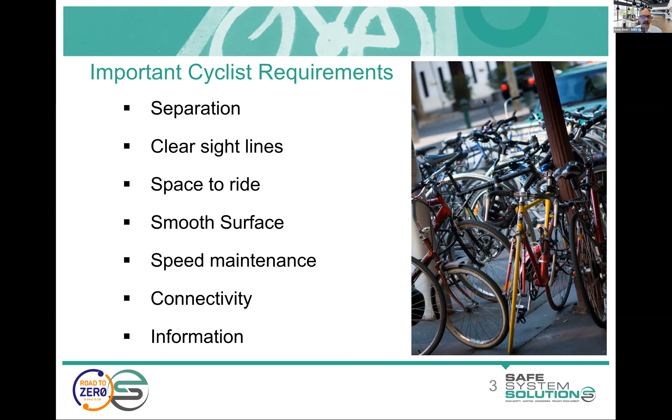So this is a sort of general cycling requirements. There's different sort of lists of things people say that you should be providing for cyclists, and I think they all have merit, and this is just one of them. But separation, clear sight lines, space to ride, good surface. Speed maintenance is an interesting one, I'll talk about that, and it's linked to safety later. Connectivity and information.

But you can kind of boil it down that auditors need to think like cyclists, or think like people that ride bikes, and that often isn't too hard for a lot of auditors because they do ride bikes, or they have ridden bikes, or it's something that quite a few people do.

You do need to think a little bit beyond just your basic riding and think holistically, but I'll point you at a few things you can do when you're doing an audit to consider that. Simple questions: would I feel safe using that road if I was riding? If I turned here, could a car see me? I've got sightline impediments, and I'm in the dooring zone. So these are all good questions to ask.

But beyond just, would I feel safe? We're trying to cater for this variety of people that ride bikes, and it is probably the road user group with the biggest, let's say, varied setup. So yes, we've got the 8-year-old, the 80-year-old, and that's a common little design thing to think. Are you designing for an 8-year-old and an 80-year-old? You should likely capture everything in between.

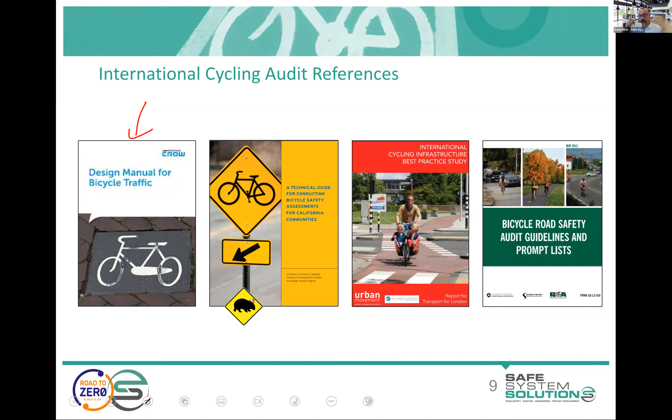But what I do find as a road safety auditor is that they'll be doing alterations to an existing bit of road, or diverting cyclists through an area because maybe they're doing construction, or it's a new bike route or something like that, and there is an existing longitudinal grate, and the cyclists are sort of going through that area. So a very simple one to look out for.

I've got a couple of expert witness legal cases associated with this. One was an interesting one where a shopping centre was being redeveloped. As part of that redevelopment, they were building a lot of bicycle parking, like a storage area - what do you call it - like a little pumping and maintenance station, and lots of signage to encourage bikes off a separated shared path facility, saying this is the way to the shopping centre. It's a wonderful thing to be doing.

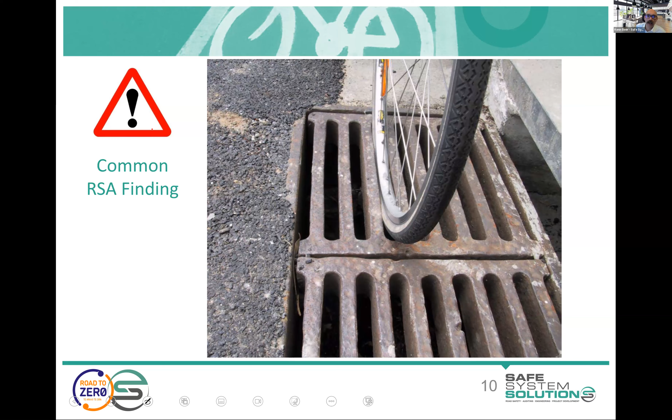Another common finding - well, common may be an exaggeration, it's happened a handful of times that we've seen this - but one to have a think about. So this design came in to do cycling infrastructure upgrades. Some of it not really infrastructure, just paint, but there were some infrastructure parts to it.

Now, to risk assess that is a very challenging thing. I certainly look at it and think I really don't think that a driver is not going to see a cyclist - they're right in front of them - but it's sort of going to be a road rage issue more than anything else here. And it's kind of hard to get to a crash associated with this. You can probably start to talk about it with a vehicle maybe going around the cyclist, and there could be issues there.

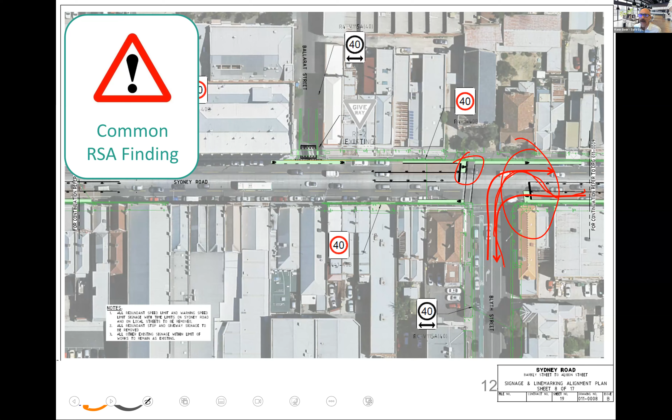Now, I do have a little quiz, more of a visual quiz, to get you looking for some issues in an existing site.

Yeah Ken, it looks like it's 50-50, we've got some sound issues for you. I can plug in a microphone. Should we give that a go? People are saying it's fine. But I think it's fine for some and not for others. Maybe could we try a microphone? I'm not sure which end it's on, but if it's fine for some, I'm pretty sure it's not my end. Okay, I'm happy to try and sort that out. How about I put the quiz up and give people a few minutes to look for issues, they type it in, and then I'll play with that and see what I can do. Perfect, okay, it could just be my voice being crackly as well.

Okay, here it is. What I want you to do is be a road safety auditor on the existing conditions, and find me issues, safety issues for cyclists. Type them into the chat.

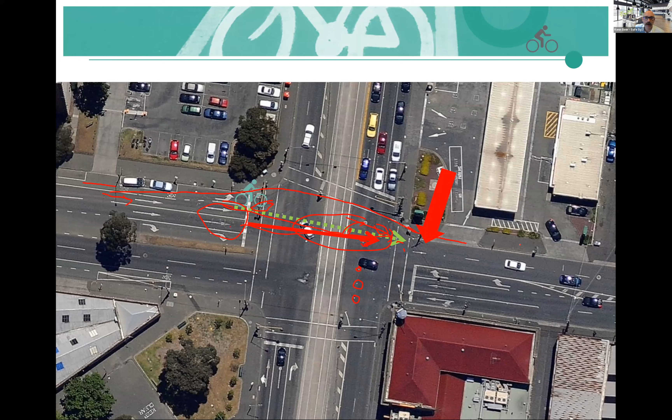And we're seeing some more of those coming out around Australia and New Zealand. I say New Zealand, I believe there's some designs floating around, but I don't think anything's been built. I can show you some of the Australian examples shortly.

You can head start bikes off early to give them a run, and you can do protected intersections, which help in these scenarios. Protected bike lanes are the real huge benefit in all of these sorts of scenarios, which I'll show you examples of shortly, and point out some things we need to think about as road safety auditors.

So cyclists and roundabouts has always been an interesting topic. This is the old guidance from Austroads and Kotahi in terms of how you'd design a roundabout, essentially an urban one-lane roundabout. It used to be that you'd try to get the cyclists as far off the edge as possible, push them out here for that riding path, so that they're away from cars.

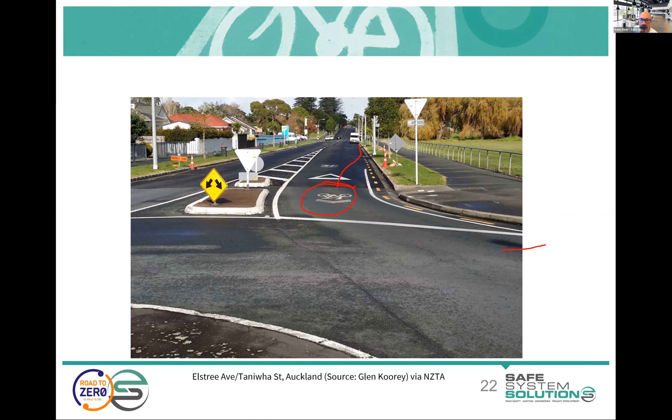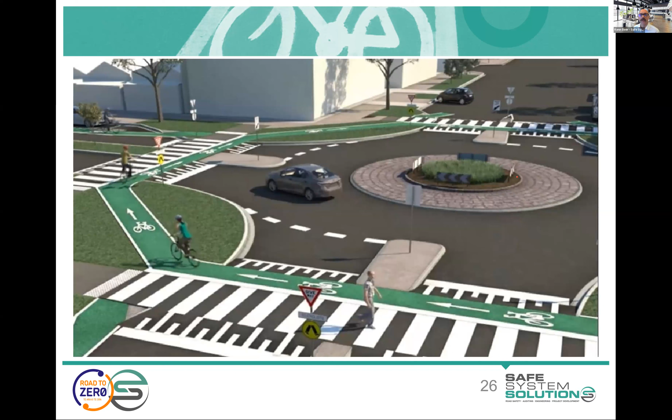Best practice is to provide a priority cyclist treatment around the outside of the roundabout on a raised platform. This type of setup is exceptional in terms of safety performance for people that ride bikes, and pedestrians in this case as well. It's encouraging - a lot of people will feel safe riding their bike through this area, and confident to do it. So that's a Dutch style roundabout. The Dutch have been doing this for a long, long time. This one's in Melbourne.

Anybody who comes to Melbourne, I'll take you for a ride through this. The idea is you keep all your good roundabout features, and you get the bikes to use this facility, and they go all the way around it. If they want to do a right turn, they'll go all the way around the outside.

Ken asks a quick question: Janko wants to know if this will actually work outside of the Netherlands, referring to the design on screen, since New Zealand drivers won't be used to it. Sean comments that the lanes are very narrow, even for one direction. Marie adds there are similar examples in New Zealand, at Richmond near Nelson.

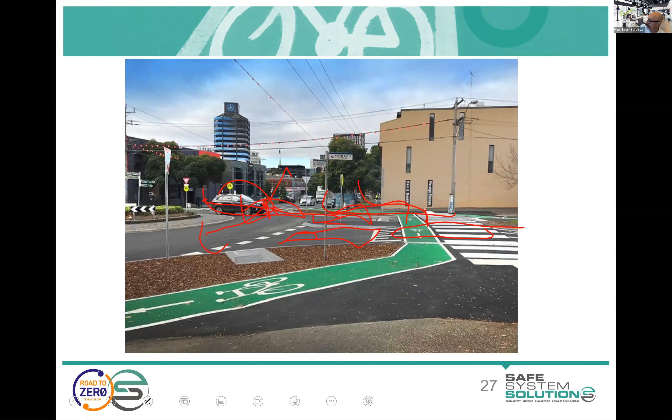Anyway, I've probably got to keep moving on, Kathy. Sorry, just one more thing - there's some great commentary about it feeling more comfortable cycling through a roundabout like this than one without any protection. Shamar saying, I think in New Zealand now you have to start putting additional give way road markings to show the priority to pedestrians and cyclists. And one more question about thoughts on safety with sharrows in general. I heard some commentary from overseas that they can reduce safety, but maybe that's where they're used in inappropriate places. What are your thoughts on sharrows, Kathy? You don't hide your thoughts on them?

So we've had a look at sharrows and their potential in higher speed environments, and it wasn't an empirical study and analysis - it was more of a think tank of designers and the like, and safety experts. It was deemed that would present a safety issue in a high speed environment. In a low speed environment, we believed it had enough to add safety if you weren't able to do something fundamental like this. But it's the acknowledgement that it's just not going to get used by a fair bulk of cyclists - they're not going to actively claim that lane.

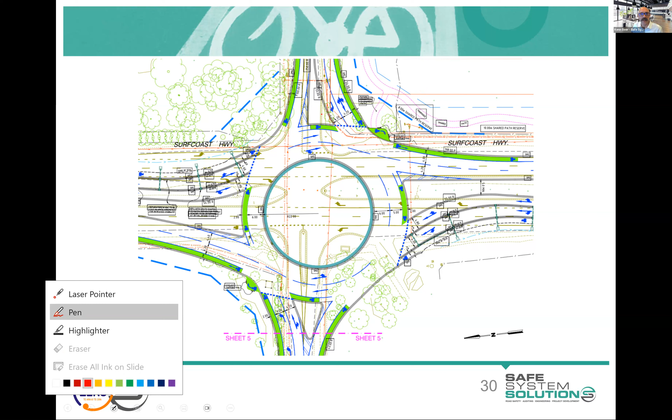They were putting like a staging spot for a bike, because 2-lane roundabouts are very problematic for bikes, and this happened to have quite a bit of bike traffic. So I was saying, okay, let's have a little staging so they can pause here, and then go when there's a safe time to do it. From an audit perspective, you look at that and go, well, there might be a little bit of benefit, but I see some dangers associated with that. Mine are, well, you're going to fit one cyclist in there, is that right? And then what does the second one do, and where are they going to prop? And then you've got larger vehicles tracking around here, and if you've got the cyclist standing there, there's a fair chance that they're going to get clipped. So it's not a great idea.

I mean, Kathy - Reese, who used to be one of our road designers, he calls this the mammal pouch.

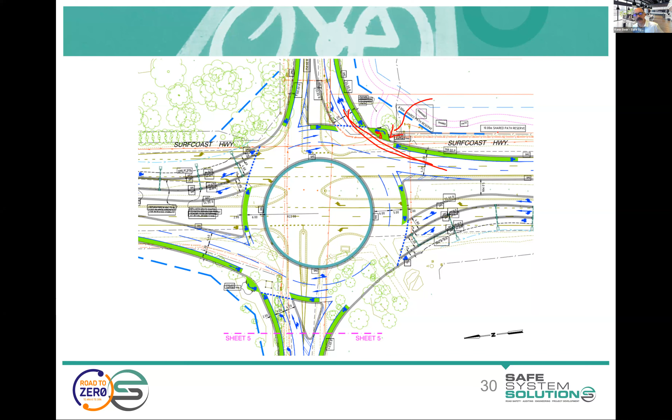Spot for the middle-aged men in Lycra to pause.

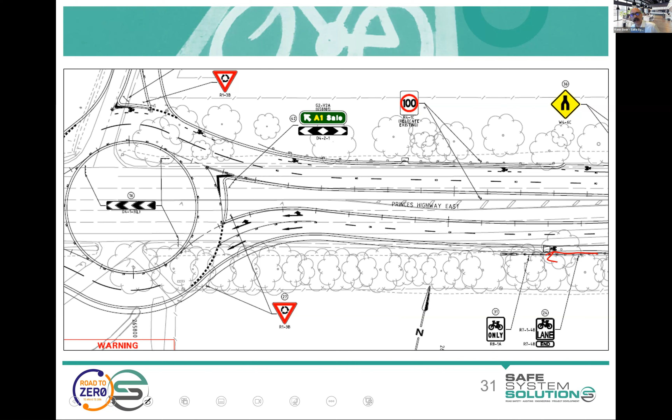This one was interesting. As a road safety audit, you look at this at design stage, and even with a bit more detail, it all looks pretty good. You've got the bike getting a separated, raised path to navigate through this roundabout if they're going straight. Going right is a bit more problematic, but you go, oh, that all looks very good, looks like it's signed.

Then you go out and have a look at it built, and it's there, but most cyclists would just go, okay, battle it through the roundabout again, because it kind of just looks like the bike lane ends, doesn't it? There's a little bike only marking, but what is that actually referring to? Some green paint would just have done an amazing job to indicate that facility, all that money spent, is actually for cyclists. So I think that could work quite nicely.

There's an example of using green marking to highlight a direction of travel for bikes. That's not its traditional use. Green markings were invented to point out to a driver a conflict point with a bike, so a driver would be more aware to look for bikes coming through that path. It's more expanded now to also include that directional use. If anybody can work out bike colors from around the world, I applaud you, because there's no conformity worldwide in what color to use.

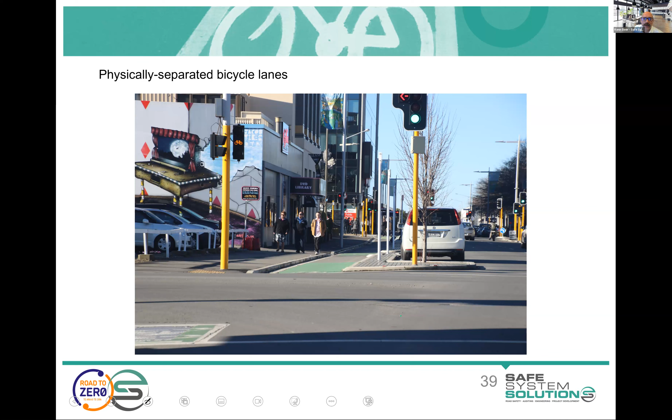This one is out of the New Zealand guidance document. Entering and exiting driveways can be a challenge, and the idea to slow the vehicle at that entry point is very good, and I like this style. Or you can use a cobblestone or bluestone treatment through here. You're really just trying to stop that fast dart of a vehicle in.

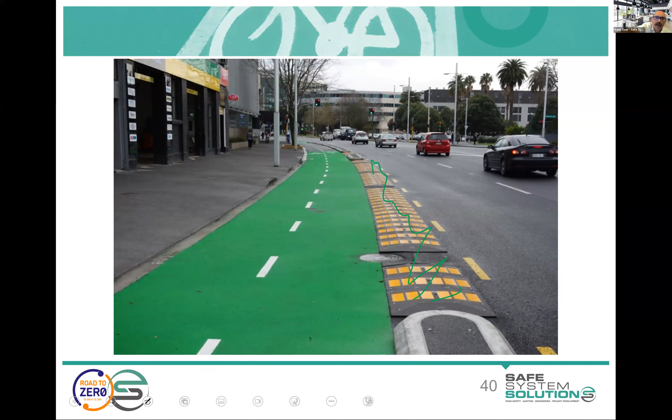Of course, in some situations we actively want to slow cyclists down because of a particular conflict point, like a pedestrian crossing. You can do raised treatments on bike facilities like this one, again in Christchurch, with the raised bit there slowing cyclists on the approach to the pedestrian crossing. So that is an option. We like to try to give cyclists a good free run, to encourage lots of cycling, but sometimes you need to consider that.

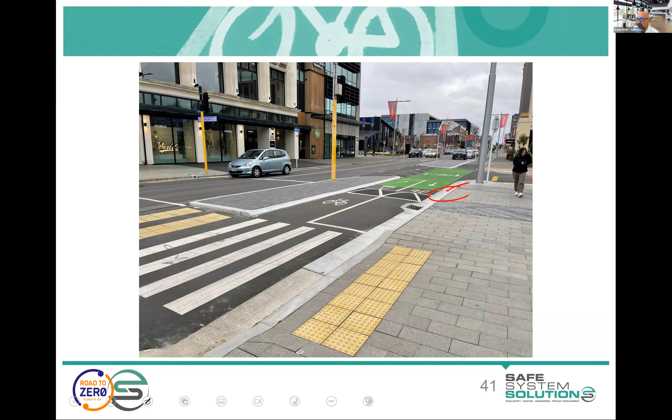Somebody mentioned you have to sign it. But if you've got a shared path facility or a bike facility that crosses a road, and you want to provide priority to the cyclist, it's a good form to do.

I always like to see it raised, but you kind of mark it like a road. There are a couple of Australian examples, but I've got a New Zealand example here, where you make that bike path crossing into a road - like it's an intersection now, and the bike path is the priority road as such through.

Now the sightline calculations on this are - well, I was going to say best practice is very complicated in how to do this. I can share a document with anybody who's interested, because you're trying to factor in - you kind of do sightline analysis like you do a roundabout to a degree, which is trying to provide both the bike and the vehicle with enough time to stop should one not stop. So you could argue that you only need safe gap sight distance at this location.

For those who aren't familiar with safe gap sight distance, that would be that a car's going to come up to here and stop. They're going to look and check whether they've got a safe gap, and then they'll go, right? Theoretically that works, but in practice we know drivers are less diligent at these locations. We would like them to be, so what we're trying to do is have it so a bike rider coming in at their speed has enough line of sight to see a vehicle and go, hey, they're not going to stop, and the car has enough to go, oh, I can see them and I have to stop, and that's how it all works out.

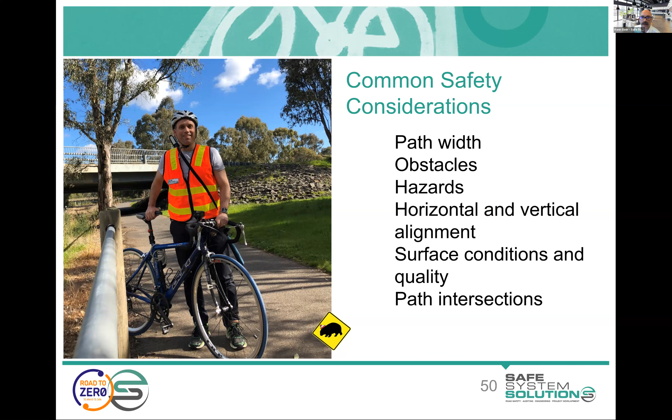So I better be quick on this, but as I mentioned, you undertake a road safety audit or a safe system audit of a bike path in not really any different form than you would a normal road safety audit, except you're really going to ride it, and ideally walk it, but mostly you ride it. There I am with my audit team, riding along, and you're looking for all of those things that present issues: the width of the path, obstacles, hazards, intersections, surface conditions, and the like.

Intersection of two paths, you can kind of think about like an intersection in a road. You want good, clear priority and good sight lines and warning, and 90-degree intersections if possible. So you don't want wide intersections and the like. That one's a bit unclear, you can see there, and you can imagine that if you had a lot of cyclists and pedestrians, it would be a bit messy.

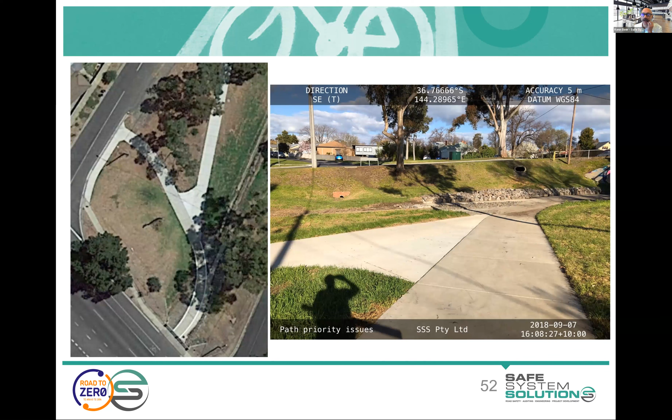And this one again is very unclear as you approach this. Who's got priority? That's actually, we talked earlier about this, essentially an intersection. You're creating splitter islands for the bike there, so it's a good way to sort of highlight an intersection as well.

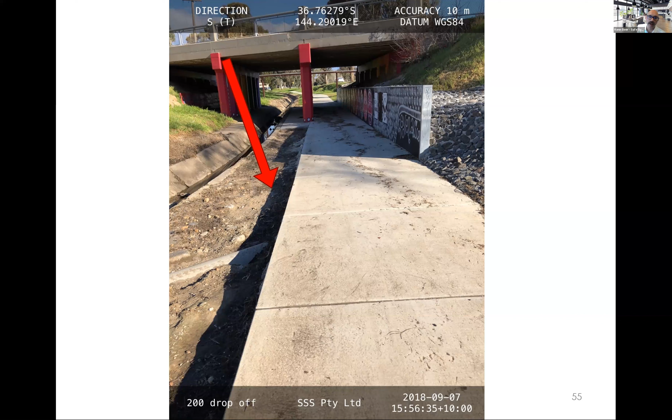Drop-offs, we think about them as hazards, even sort of smaller drop-offs. Cycle shared paths are particularly problematic because of all of that extra activity where you've got dogs and kids and all sorts of things. So a cyclist will likely at some point be having to deviate off the path, and we need to provide that little bit of rundown area as well, thinking about distance hazards are from the path and hazards within the path as well, and debris and the like.

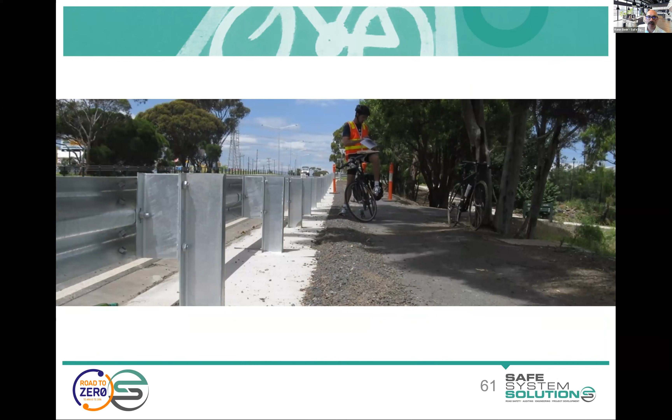Where we're separating vehicles from vulnerable road users using barriers, that's a very good thing, except the back of the barriers then becomes a hazard for the riders. So you've got to think about that, thinking about doing back barrier systems or some sort of protection on the back of the posts as well.

Think about your hazards in your path. We don't like this sort of stuff. It's obviously trying to stop vehicles getting into this area, but at night, that's certainly going to be a hazard. So treatments like this are preferable, where you'd like to get rid of that cable stay up the middle of the path, but sometimes these things happen. Advanced line marking to indicate something's coming up, in case you've got multiple cyclists and maybe they've got their head down or something. And then flexible bollards, so those when struck will flex, and ensuring that they have good retroreflectivity.

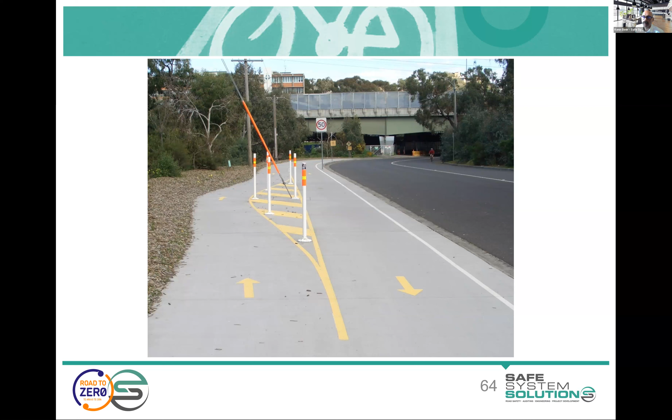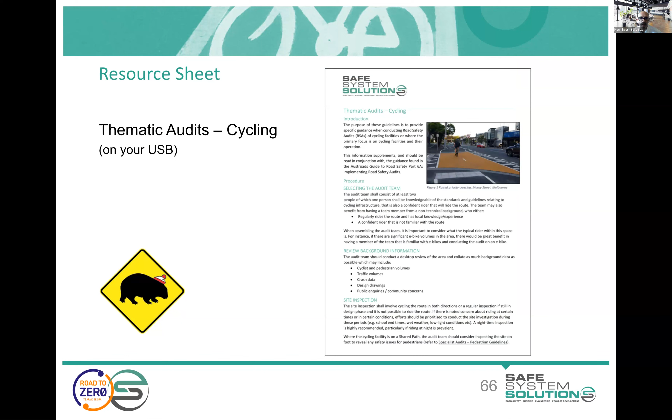And we don't have time for the quiz. No, we don't, but quick question, please: what are your thoughts on cyclists within the deflection zone of the barrier?

So ideally, you would not have a cyclist there at all. You would have a buffer between the barrier and your path, equivalent to the deflection zone nominated by that product system, the barrier type for the speed environment. That's easy to say, and I could stop there, but the reality is in a lot of situations you just absolutely cannot achieve that, and I'm okay with that.

If it's the best you can do, having a barrier system is going to be better, because we know those deflections are based on test facility deflection. So that's a vehicle hitting it usually at 100 kilometers an hour at a 25-degree angle, and it's its maximum deflection. The reality is most of the strikes will be vehicles at shallower angles, drifting off and hitting it, and that will deflect them, and they'll go nowhere near the cyclist.

So you're going to get a far better outcome. Also, vehicles, when they leave the road onto a path, will often run quite a distance along the path. So even if we have a vehicle that hit it at a large angle and deflected a fair bit, they would be off the path very quickly. So all of the protection of the rest of that path is good. Really, if somebody's saying no, we can't do that because we can't get deflection requirements, it doesn't cut it, in my opinion.

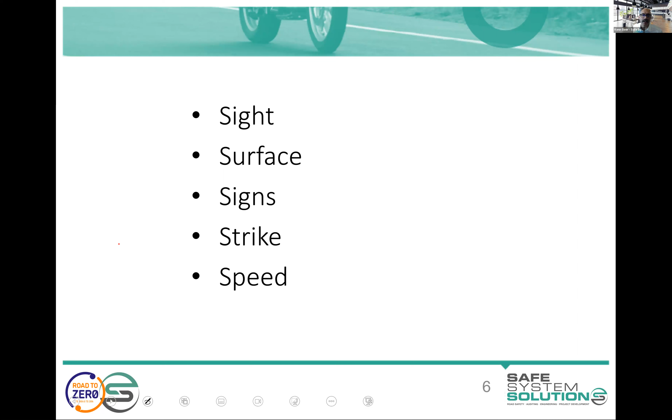We often talk about the 5 S's for motorcycle safety when we're thinking about auditing, and are we doing the best we can for safety for motorcyclists: sight, surface, sign, strike, and speed. I'll go through those one at a time shortly.

Just a little check here that I've still got everybody. What's the formula for risk again? I'll put in the chat. Risk is... there we go, yep, all coming in. Kathy, you can work out who was first. Likelihood times severity, or likelihood times consequence, or probability times consequence. The chance of incident, and then how bad that, the severity, that's what we're thinking about.

And then when we think about those 5 S's: sight, surface, and signs, that's the chance of the crash, trying to stop crashes happening. Strike is severity, consequence, how do we manage that? And speed is this magic thing across the board - it reduces the chance of a crash happening, but if the crash happens, the severity is also less. So it's hugely important. Okay, so I'll just very briefly jump through those 5 S's with some photos to reinforce some of that.

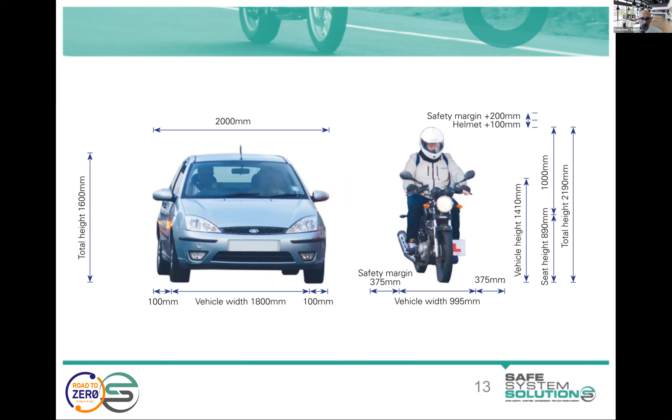Also, riders' forward sightlines are quite important in understanding the road environment and not creating any surprises for them. So really good advanced warning matters. Motorcyclists have been found to be the most alert road users when it comes to signage and what we're providing with signage information, and they act accordingly or prepare themselves accordingly. So we have a good opportunity to lessen the likelihood of crashes associated with that.

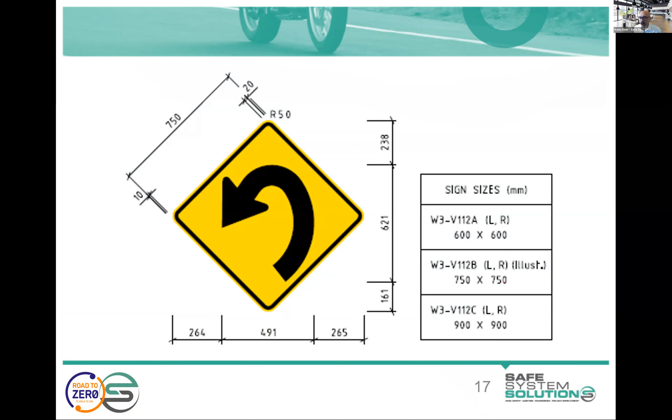Does anybody know—you can see this is a curve that tightens up—does anybody know what the actual name of that type of curve is from a geometric perspective? It's got a very specific name in road design. Yeah, Brent's onto that, Kathy—it's a compound curve. A hairpin would just be one that goes very tight with a single radius. Spirals, yeah, not bad, I guess.

And it could be out of context as described there, but really any curve could be out of context as well.

This sign is particularly useful in mountainous areas, often popular motorcycle routes, where you've got a compound curve. The reason it's so useful is that a rider on this type of curve takes a lot of clues on speed and line from what they can see in that radius. And if you have a double radius that tightens up, riders often find themselves in a position where it tightens on them and they go onto the wrong side of the road, or off the road environment entirely.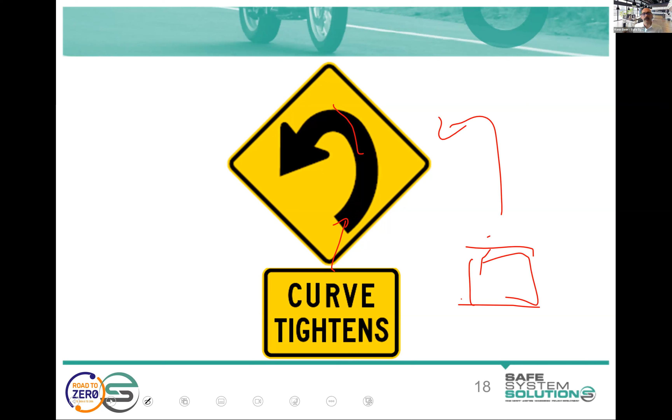This sign pre-warns riders—if you just use a normal sign with a speed advisory, it's good, but riders are also looking at the road environment itself. So we've had a lot of problems with these compound curves on motorcycle routes.

Here's actually a real world example: a 252 radius curve into a 117 radius curve, and four run-off-road motorcycle crashes outside of the curve as it tightens up. So yeah, I think it's a vivid example.

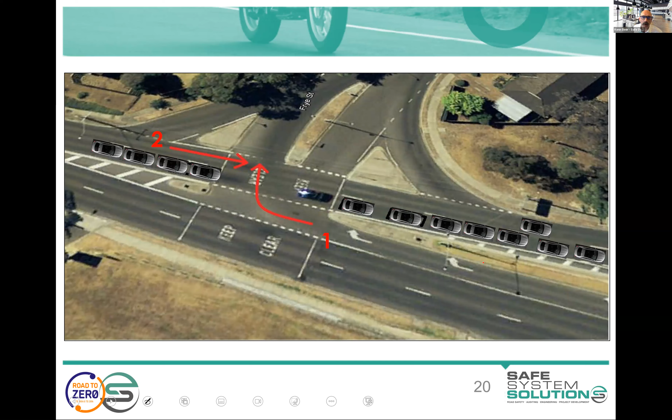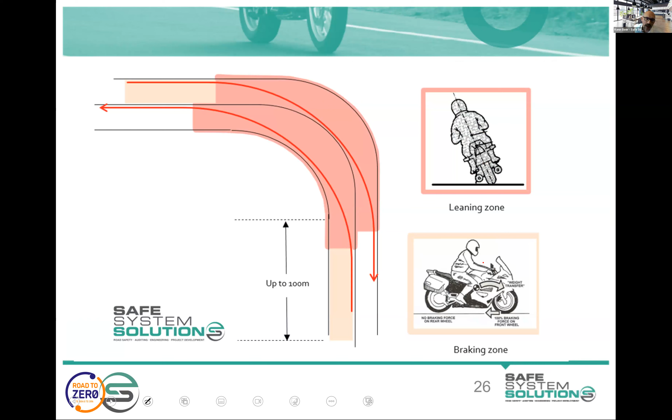This is just a couple of pictures to remind you that a rider takes a curve or corner and leans to do so, which shifts their center of gravity and makes the road surface really important for a motorcyclist. Anywhere a rider is leaning or braking, we want to try to provide really good surfaces. We'd like it everywhere, but those are our most critical spots—we want good skid resistance and a smooth surface.

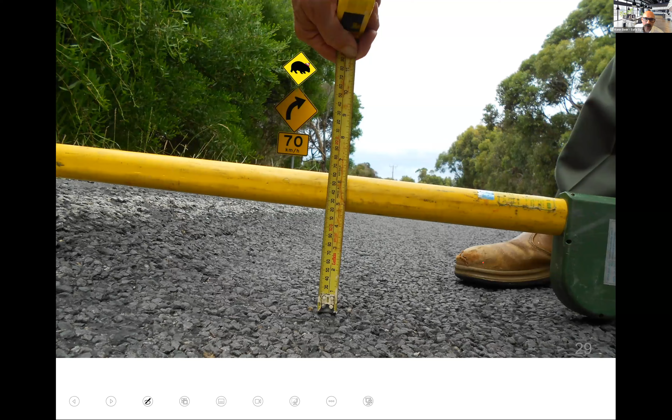But unfortunately, of course, we see all sorts of depressions in the road—different potholes, blowouts, slips, flushing, even gravel and debris from roadworks or side roads, and all of these things. Motorcyclists are the canary in the coal mine for all of this sort of stuff. Yes, they're an issue for others, but motorcyclists are the ones that are going to be killed first.

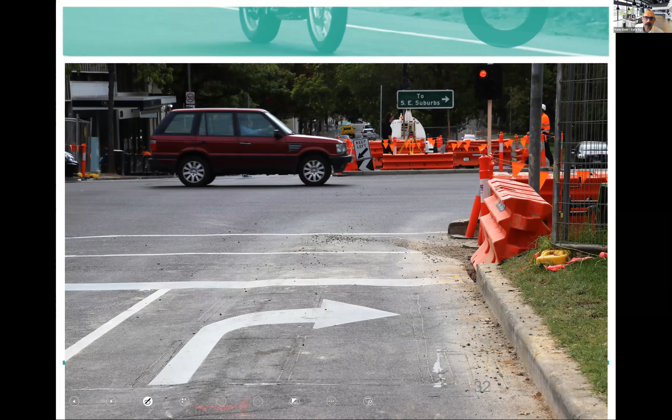And even things like patching, where patches are going to break up first on the joins, and how we put them in rider lines - these are all challenges we face in managing our road system for motorcyclists.

So all I'm trying to do in this presentation is make you aware and thinking about some of this. Each of those individual circumstances you look at as an auditor or designer, or even for an existing road, they all come up with their own specific nuances to think about. But motorcyclists certainly need to be part of your thinking about safety for the traveling public.

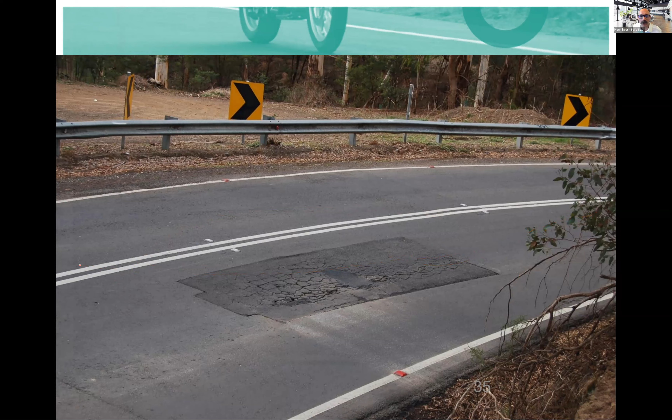Of course, ideally the patches would be better and wouldn't need this, but sometimes that happens. Think about the use of steel plates, service covers, and anything like that - it's going to be very slippery for a rider if it's wet. You might think, well, they'll see that for sure, look at the size of it. But you have to think about a rider following behind other vehicles at night, raining a bit. It's not good for cyclists either.

If you're looking at a design and you see that their services are in the road, as an auditor it's a decent thing to question whether they could be relocated. Sometimes it's very hard to do that, and sometimes they'll come back and say the cost to do that outweighs the cost of the whole roundabout or something like that, and they can't do it. But that's not going to be good.

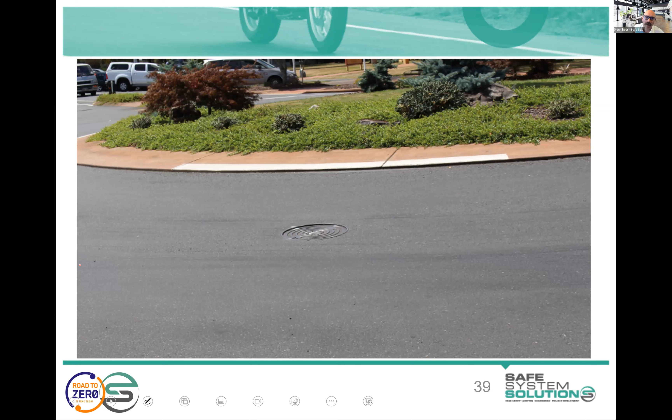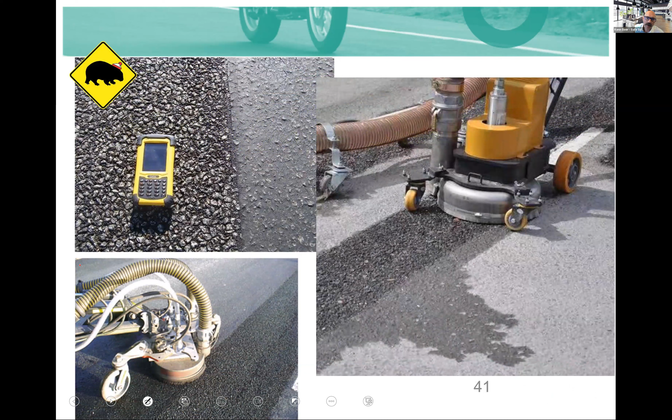This one's in Rotorua, in a roundabout. A rider is looking all around to check for vehicles entering and coming at them. They're on a bit of a lean sometimes, so we don't like surface deficiencies in those sorts of scenarios. We don't like them anywhere, but these are starting to get more problematic. So we can improve skid resistance through water blasting, improving the surface from that perspective, and that will help our riders.

Curbing - simply put, the more mountable the curb, the better for a motorcyclist. However, to manage water we often need to use particular curbing and the like, so you can't have fully mountable curbing everywhere, but it does help to provide that little bit of runoff for a rider.

Now, I can almost guarantee if you're doing a lot of safe system auditing, you will come across a design that wants to paint something big on the road. Paint on the road is important, but we need to think about where we use it and how sparingly we use it. This sort of stuff is going to get slippery, even if the line marking tells you it's got great skid resistance - yeah, well, that's when it's first put down. Give it a little bit of time and it'll polish up and get quite slippery. So we try to minimize where we're doing that, and think about whether it's an area where a rider is going to be braking hard or leaning.

These are particularly problematic. One thing I've seen a good handful of times in my career is somebody has an intersection with an overshoot problem - people missing the intersection - and they want to paint a big stop sign or give way sign at the intersection. A rider is also going to be subject to a see-through effect or this potential overshooting, so they'll be slamming their brakes on hard right at that point, and then you're putting a potential skid resistance issue right at the most critical point for the rider. So that's where we need to think about them particularly.

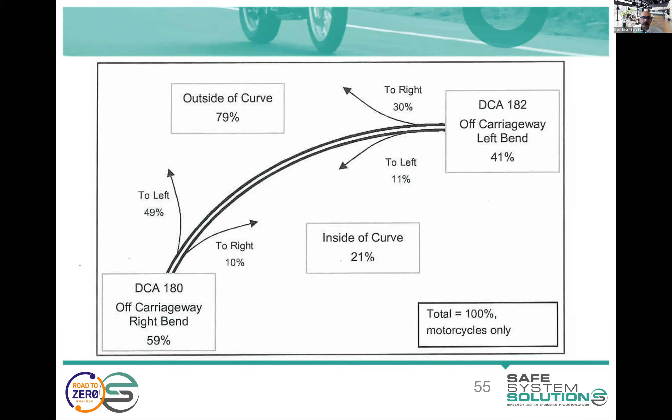We spent a fair bit of time analysing motorcycle strike hazards and what forces motorcycles can tolerate, and where riders are striking objects. I had a graduate analyse a heap of motorcycle crashes on curves to check where things were happening: 79% on the outside of a curve, which physics tells you is going to be the case. Cars are about 50-50 inside versus outside of curve due to overcorrection, but riders don't have that overcorrection luxury, so the outside of the curve is pretty important.

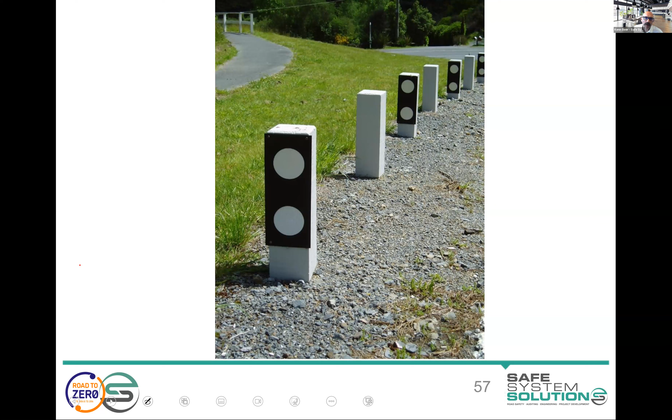This was an interesting one - doing some auditing of the Coromandel area, a very popular motorcycle area. Many of you have no doubt holidayed up there, it's a beautiful part of the country. We've got some surface issues, outside of curve issues, and these concrete post things being used, which are obviously going to be a hazard for a rider. It's not going to be good for vehicles either, though in this scenario vehicles will probably be going at a speed low enough that it's unlikely to present major injuries for occupants, but a rider certainly would be in a lot of trouble.

Signposts are a hazard for riders too. We've certainly moved to galvanised steel posts or fluted aluminium posts in New Zealand these days, but those are easily strong enough to kill a rider. Don't be fooled into thinking fluted aluminium is somehow frangible for motorcyclists - that's a myth, those things are very strong. Frangible for a car, absolutely, but the more friendly types of things for motorcyclists are flexible sign ranges and support posts. These have maintenance challenges, challenges on height - you can get wind load and flopping around - but there are some products available.

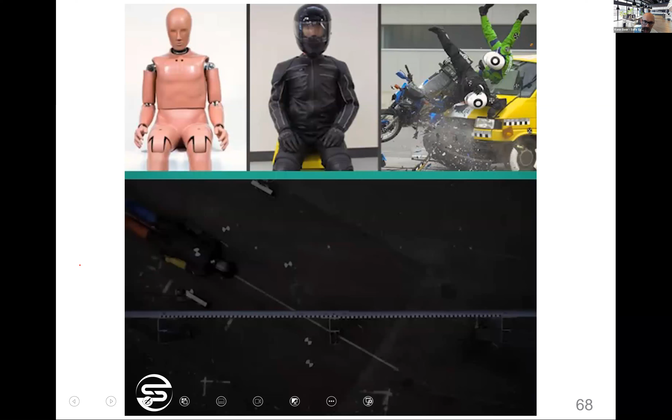There is a European crash test standard for motorcyclists with barrier systems, and it involves getting a normal crash test dummy. You do a little bit of welding of its neck and its thumbs, but that's a different story. Then you put it into leathers and a helmet, then you slide it on a sled and throw it at the post and between the posts. So that was without underrun protection, and this one is with underrun protection.

You can see the first one is unsurvivable, this one is survivable and passes the test. It passes it at 60 kilometers per hour at a 30-degree angle, meaning that's not going to provide severe injuries to the rider. It will provide injuries, but if I play it again, that's dead for sure at 60 kilometers an hour. In fact, that motorcycle crash test dummy in that one was a write-off, so the New South Wales government spent another $300,000 getting another motorcycle crash test dummy after they did the post test.

So the flexibility there is somewhat helpful, but it's the redirection of it and the fact that the rider slides along it. You can see there underrun protection nicely put on the barrier there on the curve.

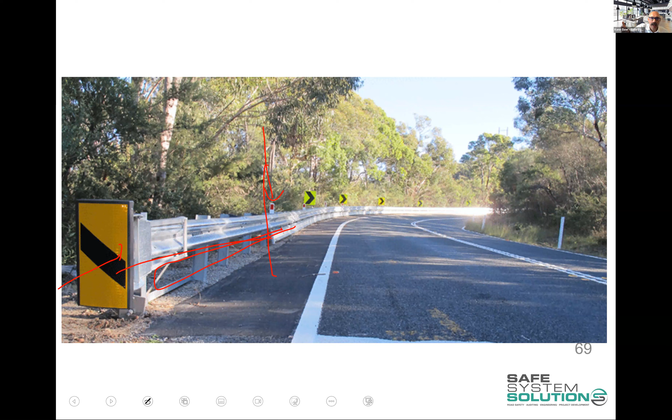So the advice these days is you don't attach anything to your end terminals. If you're in a situation where you're worried about that spot, you'd bring the barrier further up. I think if somebody mentioned it, it's like they've brought this out enough that hopefully most riders wouldn't hit that location if they did come off on the curve, but you may want to adjust that.

So, wire rope safety barriers - the motorcycle community is now fairly good at knowing the actual facts on this, that wire rope safety barriers are not a particular hazard compared to other barriers. There's a lot of talk about 'cheese cutter' and the wires slicing riders and these sort of things, but all the analysis shows a rider is going to be hitting the posts or going over the top of it. The wires are not going to play a role. They have not played a role in any of the crashes associated with motorcyclists and barrier systems.

The only thing I'd say is that there isn't really a good retrofit device - there's not an underrun protection device for any of the wire rope systems. So on a popular motorcycle route, you really would never use wire rope safety barrier, not necessarily because of any increased risk to motorcycles. You just physically can't most of the time because often those routes have curves and they're curvy roads.

You can't install this type of barrier system on a curve like that if you're looking down on it, because the way those barriers work is you put your posts in, you put your ropes in, and then you tension it up. So of course, if you're looking down on the road and you tension that - well, anything tighter than about a 200 radius curve, you start to see your posts bend in as you tighten.

People have tried football goalpost padding style treatments around the posts of wire rope systems, and it's not going to be that effective. It might do something in some crashes, but really you're trying to manage energy by absorbing it in a very short period of time rather than running energy along the system if you have underrun protection.

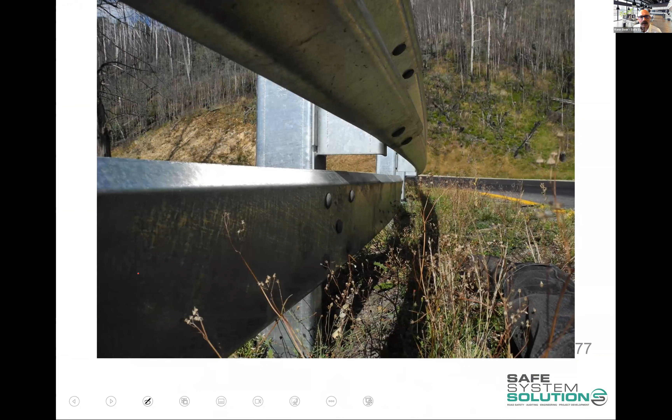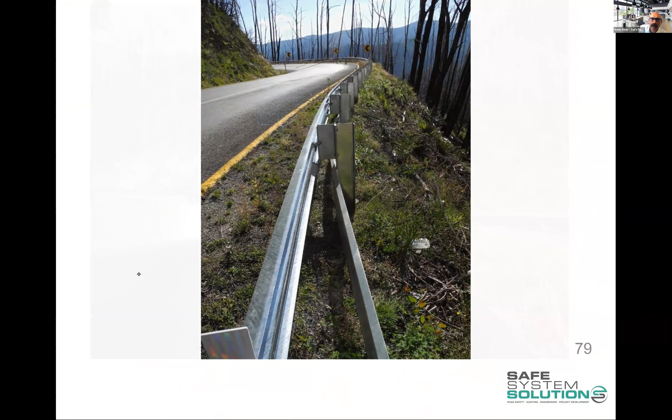Little tip: make sure they install the rub rail as it's meant to be, with a bracket that sits it out. You don't want gaps like that because, well, there you go—you can get your leg in there, you can get an arm in there, and you're not getting the advantages you want. Gaps cause trouble. You want to try to make it all as flush as you can.

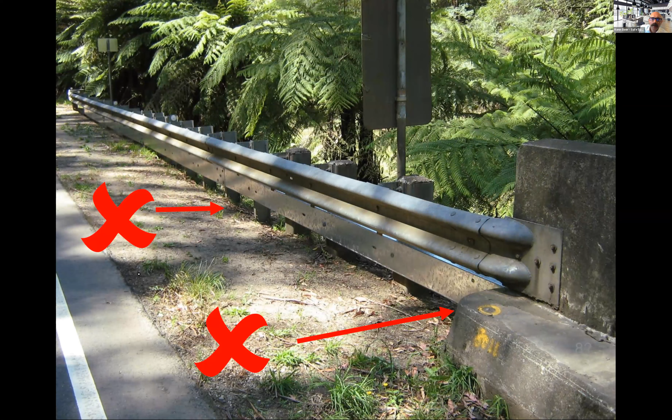And finally, speed's very important. For motorcyclists, we can influence speed of riders through good delineation and speed advisory signs like this one. Regulatory speed limits work really well. One of the things you often do when doing a motorcycle audit of a whole route is critically check that advisory speeds are appropriate for the types of curves, so there are no surprises—like coming into this curve thinking the 35 back there was actually way sharper than this one, or vice versa. That's where inconsistency causes trouble.

I mentioned motorcycle audits a few times, and certainly New Zealand does do motorcycle audits. They seem to come in waves and batches for some reason. That's where a rider will be part of the audit team, providing advice from on the bike, while the audit team follows in a trailing car, stopping to get info, and writing it up as per a normal audit.

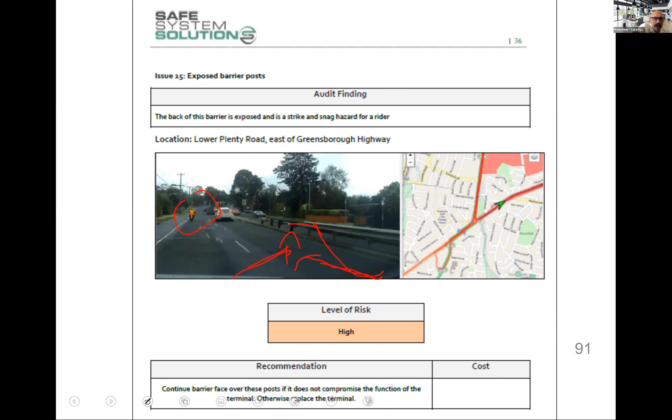So this was one example. We've got our rider out there with a microphone in her helmet, talking to the car behind, saying things like 'worried about this, see this, okay there's avoiding this pit lid.' The auditors in the car are also looking at things, and it's all filmed. In this one we're interested in the back of that barrier system in the middle of the road being exposed. We thought, imagine if a rider was overtaking in this lane and a car pulled in front of it—which is very common because riders are harder to see—the rider may be pushed into there and then snag on that barrier.

There's also a bit of advice on thematic audits for motorcyclists, which we'll put in the learning management system. And Kathy, I had a case study which I don't think I'll do since I pre-recorded it, but we should be able to dig out a recording of that if anybody would like to see a bit of a case study for motorcycle safety and rectification. But I wanted to give enough time, Kathy, for you to take us through the actual safe system audit that people are going to be doing.

Well, it's modified and trimmed down so it doesn't take everybody a week—it takes them only a few hours. But are there any questions to deal with first?

I think we're good with questions at the moment. So what I'll do is just go through what people need to do. And if anybody does have any questions...

Cycling—well, interestingly, I reckon there's such wonderful knowledge around cycling safety in industry available, so you've got lots of places to turn to for advice on that. Motorcycle safety specifics, I think we're really lacking, so I'm more than happy to provide lots of intel because I spent a lot of my life doing motorcycle safety stuff. If I can help out people there, sing out, and I'll try and help.

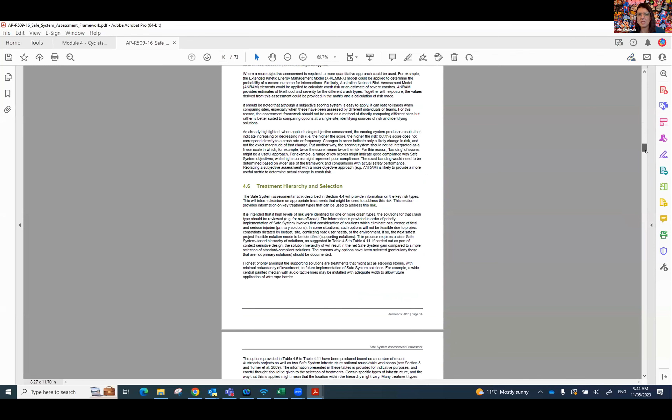It actually lists here, head-on treatments. So it tells us that a flexible median barrier influences severity. And we tend to think it influences likelihood. But we also don't want to go against the guidance.

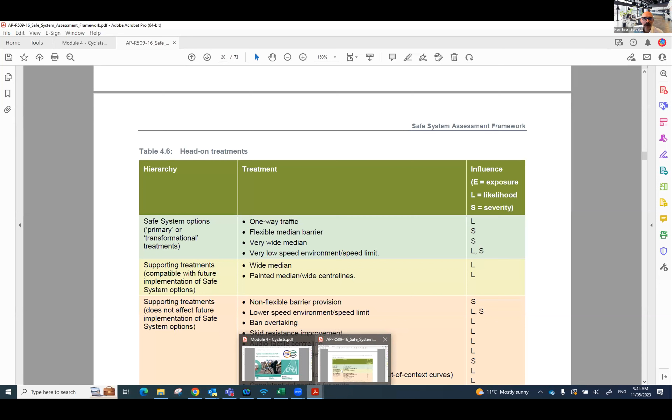You're going to have to give people the points if they said severity. Absolutely, that's what Austroads for sure said. But yes, we've certainly talked to Austroads about this, and added it to the list of if we do an update, we'll alter it.

The reason we say that is it just doesn't make sense, because we're basically saying either your barrier is strong enough that nobody's breaching it, there'll be no vaulting of it, no going through the barrier, in which case that's exposure. We're not exposed to head-on crashes in those scenarios. If you have a physical test level 5 barrier system down the middle of your motorway, you're not going to have head-on crashes, right? You just can't get them.

But then if you go into flexible barrier systems, we know they're very effective, but sometimes people vault them or breach them, and when they do, the head-on crash is still the head-on crash at the speed it was going to happen. So what we're actually doing is reducing the likelihood of that crash.

But Austroads has gone with severity because it's a barrier system, and we usually talk about barrier systems always reducing the severity of crashes, because hitting the barrier system is still a crash. So they're more focused on that. Okay, you've hit the barrier system, but we would say that's not a head-on crash - that's a run-off road crash, if you're going to call it anything, when you hit that barrier system.

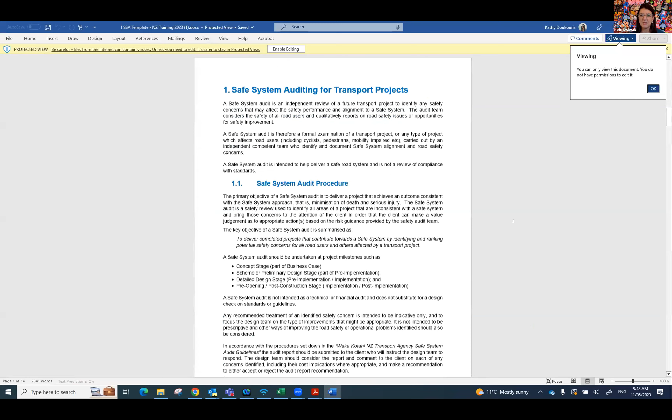So we've given you a template, and what we've asked you to do is basically do the highlighted section. So most of it is in there for you. So anywhere you see a highlighted section is the areas that you need to fill in. And there's some helpful, useful information in there telling you exactly what you need to do.

Just in regards to the audit team, if there are other colleagues that have got the same site as you and you would like to do it as a team, you can do it as a team. And so we need you to write all the members of the team that you were doing the audit with, but you each need to write your own report and submit your own report, if that makes sense.

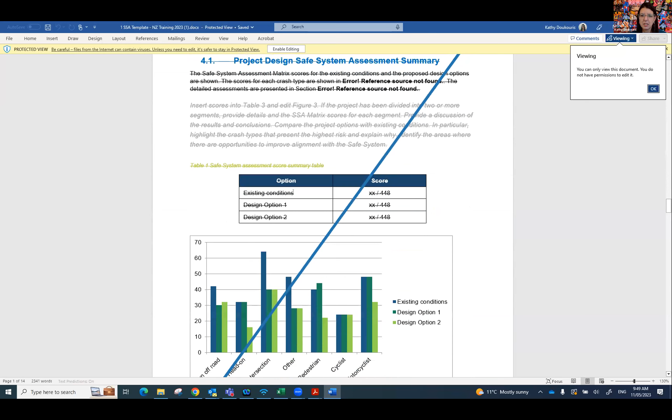So you fill in here a bit about the project background and objective. We only need something very brief here. Anything that's crossed out, you don't need to do. You're not doing the safe system assessment matrix in this part.

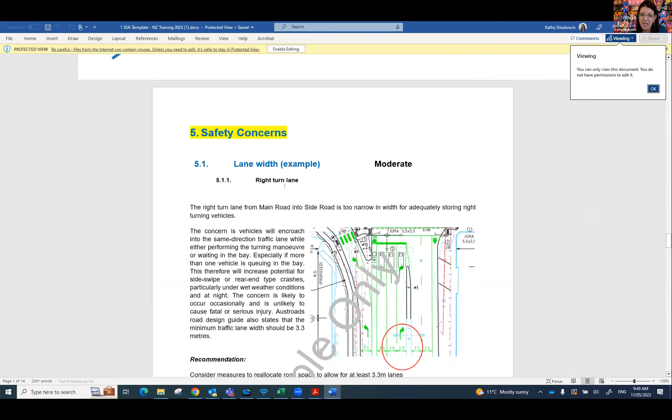And Ken, do you want to jump in here? Put you on the spot. Here we go. Yes, so we put an example in there to just show you what sort of level of information we'd be expecting - snippets of the design. So I can see your email now, Kathy. That's all we're seeing on screen. Sorry.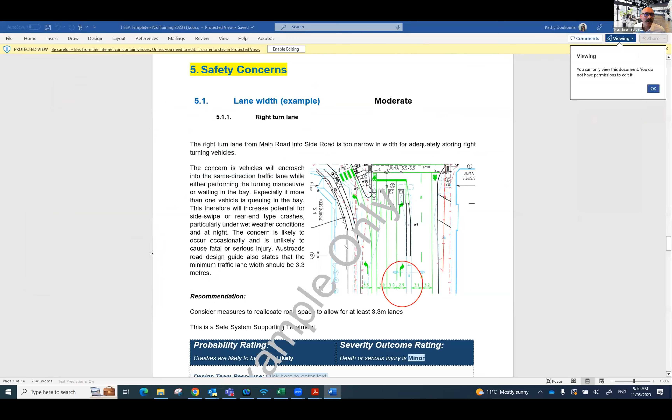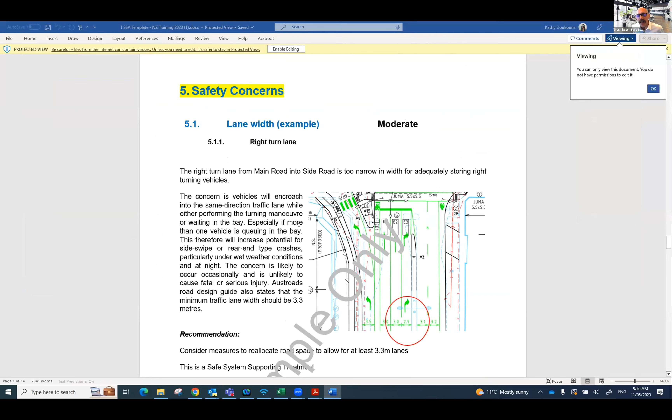So as an example, when you're writing up the finding, try and follow that formula we talked about: the issue, the crash that's going to happen, factors that influence risk, any standards or guidelines that are applicable if they're applicable, but you don't need to put that in at all. A nice little snip of the design or a photo from the site pointing at the issue.

That's all looking very good. You can see there that the drop down says minor, that's a drop down. Over the left there's likely, that's a drop down as well. And up the top is where the risk rating is, it says moderate, so that's another drop down.

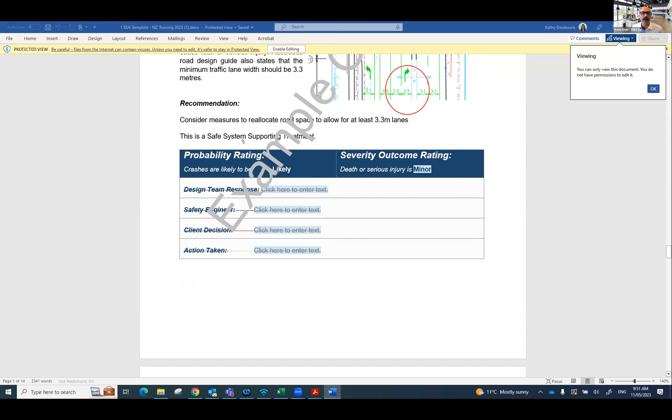And you've got a recommendation to do. There's a recommendation, and we want to see that safe system supporting, safe system primary treatment. You've got to categorize your treatment. So the things you've got to do are: write up your finding, put the risk rating in, put a recommendation, and a safe system categorization with it.

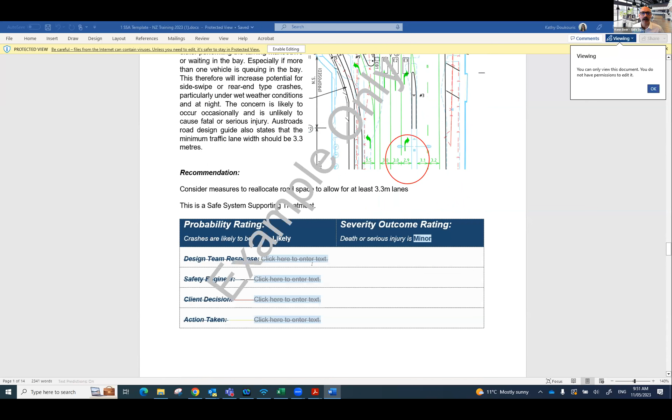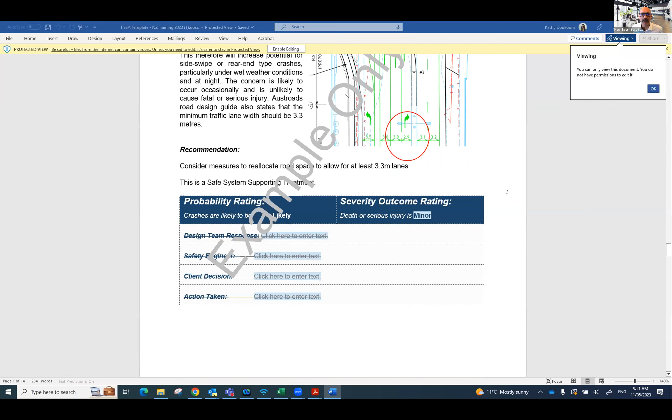You leave all of that other stuff blank. That's always there for the designer, or the safety engineer and the project manager, to fill out their information. And in the other ones further down, we've highlighted the stuff we want you to do. So you'll do that for 3 findings.

And don't do any more. I know that some of you will find 20 things, but don't, we're not going to read more than your first 3. If you do more than that, you're spending your time doing it. We decided 3 is enough.

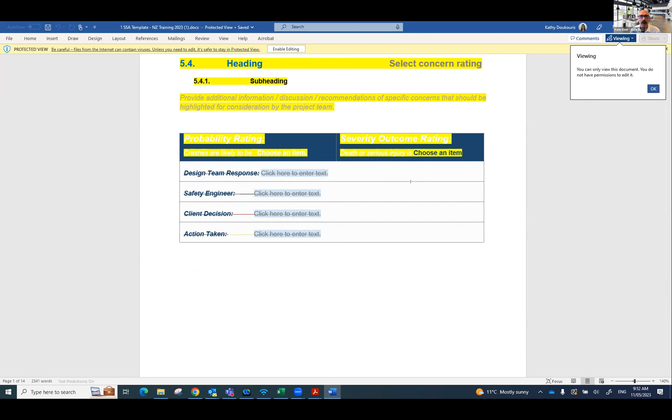Every one of them will have at least 3 things that could be presented. They will all have probably more than that. But if for some reason you're going, everything looks perfect here, I can't see a crash that's going to happen in the future at all, maybe get in contact and we'll have somebody sit down with you and talk through some of the issues.

You can always go to the Austroads Guide to Road Safety Part 6 prompt lists and read through those questions. That will help you find issues. That's a very useful document. It would have hundreds and hundreds of questions in there for you to prompt your thinking, and will very much help you out.

So it's in resources, as Kathy's showing there, resources, reference documents and resources, or of course you can get this from the Austroads website. But there, a little bit back, there you go.

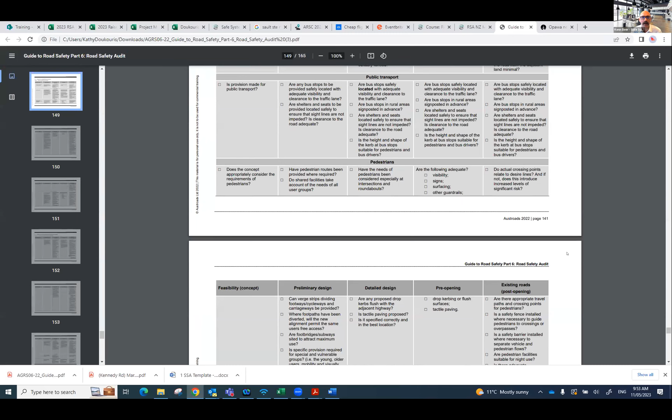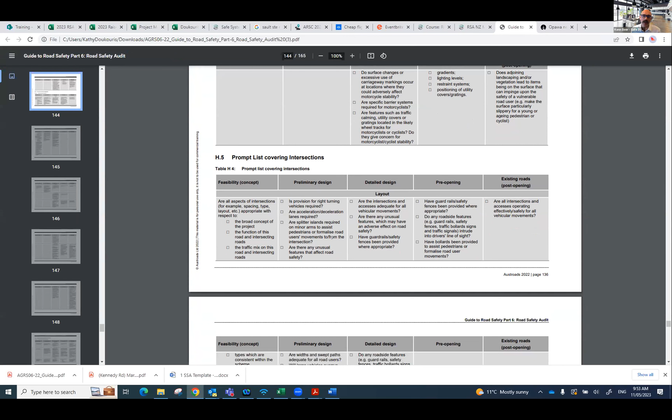So you'd be looking at sort of the feasibility stage / preliminary stage designs. We haven't given anybody detailed design just because we don't want you to actually have to take a week to pore through documentation and things like that. We just want you to prove that you've got your head around this idea.

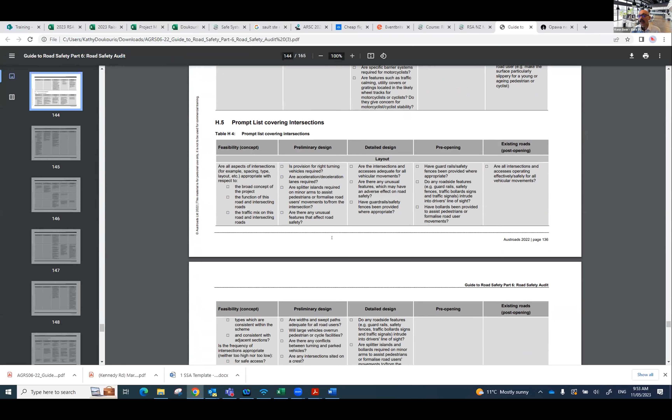But so those questions would be good. You could drift into detailed design, it's just you're going to have a lot more of them where you're just going to go, not applicable. I didn't give us swept path diagrams, I don't know what the drainage is. So those earlier questions are good and they'll help you go, oh yeah, okay, I didn't think about where vehicles that are turning are going to block sight lines or those sorts of things.

So then you complete all of that PDF. That helps us, and you upload it.

And Kathy's in teacher mode, so if you switch yourself to student mode, you will then add submission, plonk it in. Now, you've got 14 days and 7 hours and the clock is ticking. That's plenty of time because, as I say, it's a couple of hours work if you're going to do it well.

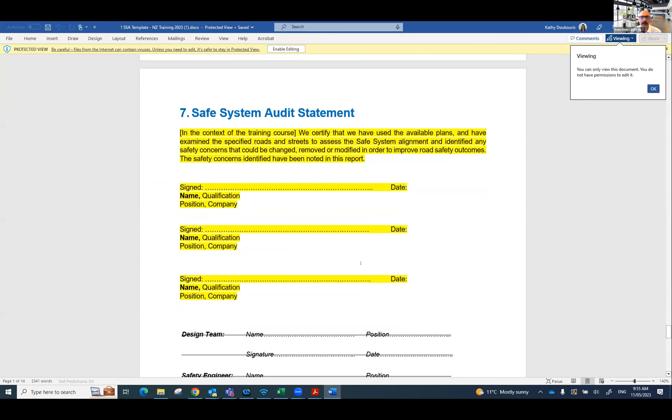And you're going to go and look at the site. You're going to do that very safely and carefully, but you don't need to be out on the site for very long because you're just gathering some context of how it looks and operates, imagining that design on the site and thinking about how it ties in and other implications. And because it's part of the syllabus of an audit course that you go to a site, you do that process.

So we do require you to go to that site and we want to see that you actually did that. And so we want a selfie or some photo of you at that site wearing your high-vis vest and safely there. There's an example of me. So in that Word document, you're going to replace me with you at your site, and that will be the last thing there.

We don't need you to put photos of your site - like all the photos from all the directions and things. In a normal safe system audit, you'd put some photos of the site to show different views, and you'd put some of that into issues. You may do that in this assignment. If you can see a particular issue, you could take a photo of that and put it into the actual finding. But we don't need just photos.

Anything I missed there, Kathy? I think you've got it, Ken.

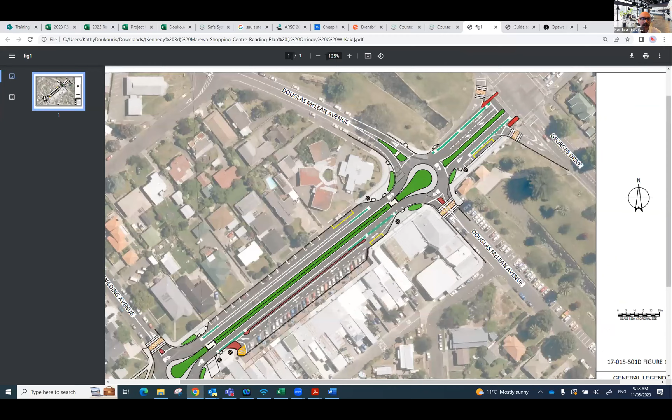So what would you be thinking about that? I'd be thinking about - are we squeezing cyclists up there on the entry and exit? I've got a cycle lane right on one side, but then it goes to sharrows. Is that the best we can do there? How's that going to operate? Are we going to get queuing issues?

Anyway, sorry, I'm doing somebody's audit for them. It's your job, happy for you to continue.

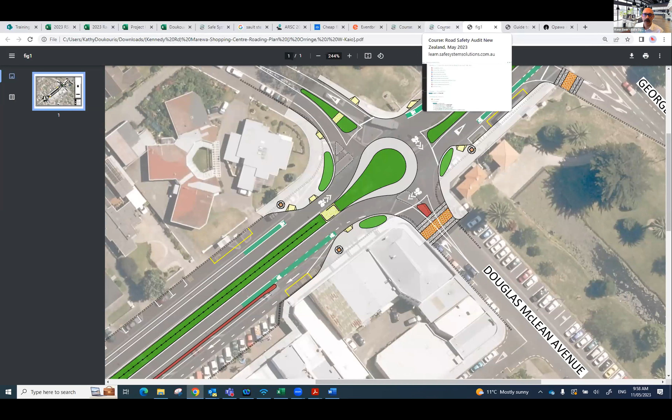That's it, any questions? I'm just going to point out some other bits and pieces. I will update this slide back shortly, the cyclist one. And there they are - those motorcycle case study videos that Ken mentioned earlier, and some more information on thematic audit resources in here.

Couple of quick things I need to say - you do not go out there at night. In a normal audit you would definitely go out there at night, but we've elected not to have that for our training exercise, just to cover off some occupational health and safety requirements. Do not go out there at night as part of this exercise.

And yeah, it will be a preliminary design or feasibility concept design. It's not going to make a big difference which you decide to look at, and most of these sort of sit as one or the other. So preliminary will be fine - call it a preliminary design stage audit.

Sorry, Kathy. No, all good. And any findings - they don't have to be significant or serious or different. You just have to write up 3 findings.